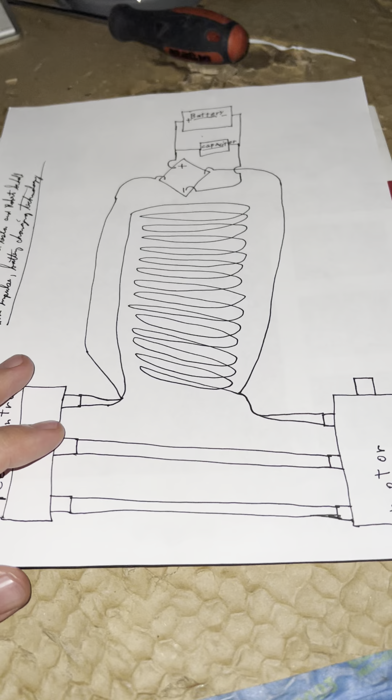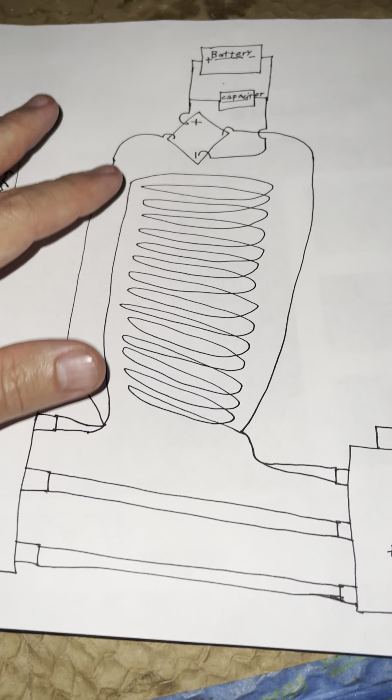So I've been studying video 7 of Energy from the Vacuum, the first 15 minutes. I'm not saying this is what it's saying to do, I'm interpreting. I was inspired to draw this out after watching that portion. By the way, highly recommend watching that series, it's available on YouTube, there are 42 videos available for your consideration.

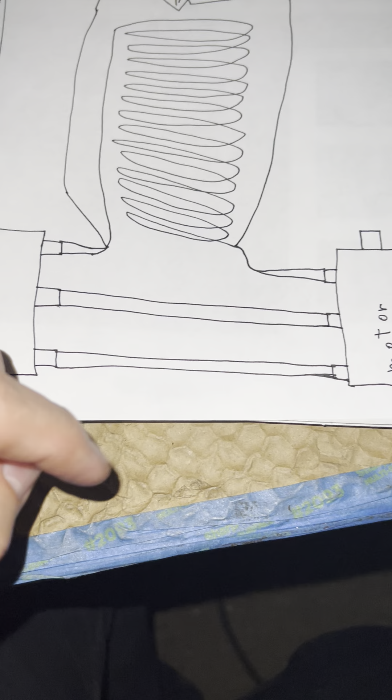So what I was thinking was, let's say I have a motor controller that has 3 wires. The question is, can I run one of the wires in series, going through this coil, so it goes in one side of the coil and comes out this side and goes into the back of the motor, so it's going to run the motor, right?

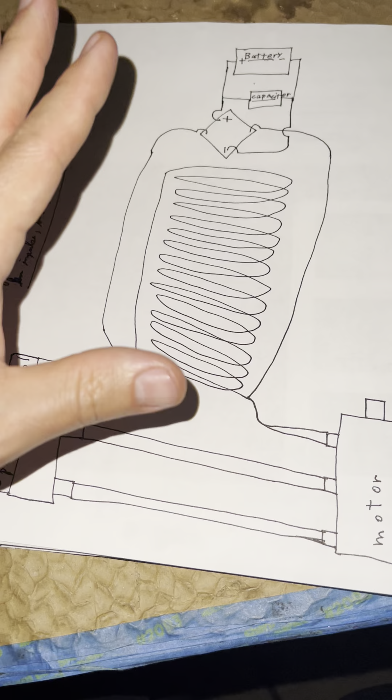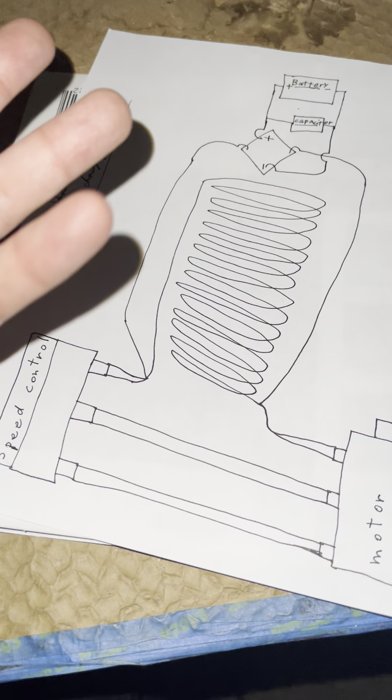In addition to that, I've connected here, and I go into a full wave bridge rectifier, and I'll be using a 50 amp, 250 volt full wave bridge rectifier. If I need to use something different, I'll keep you updated as I progress through experimentation. But I'm going to start out with the ones I have right now, which is approximately 50 amps, 200 to 250 volts.

And then I'll go into a capacitor, and then into charging a battery and see what happens. So it's just an experiment, a thought experiment, and I'm interested in experimenting with this. I'm not recommending anyone do this, I'm just saying this is what I want to do as an experiment.

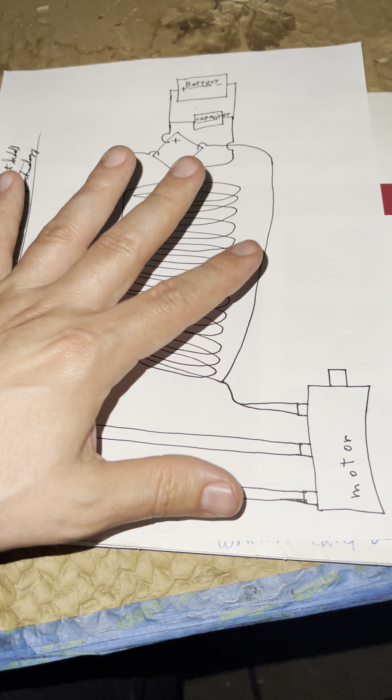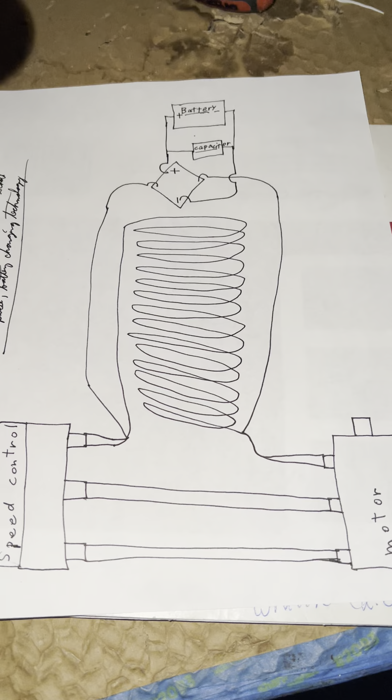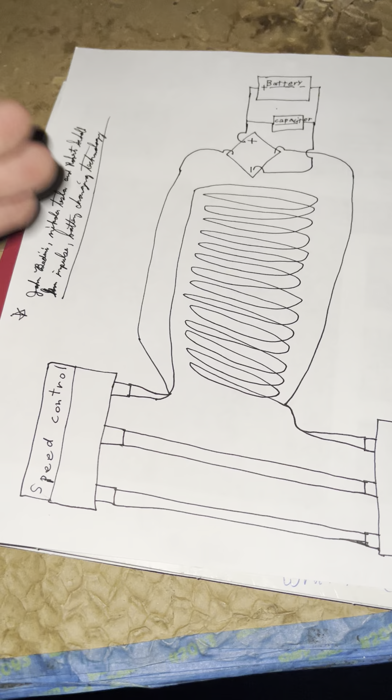Highly recommend, make sure you make copies if possible, a duplicate of the Energy from the Vacuum series. It's really important to have that for yourself, for your research and study purposes. Make sure to save a copy somehow, because I think YouTube allows you to download the videos. I don't know if you need a subscription, but I know the videos can be watched for free right now. If you want to download them, you might need to look into how to do that.

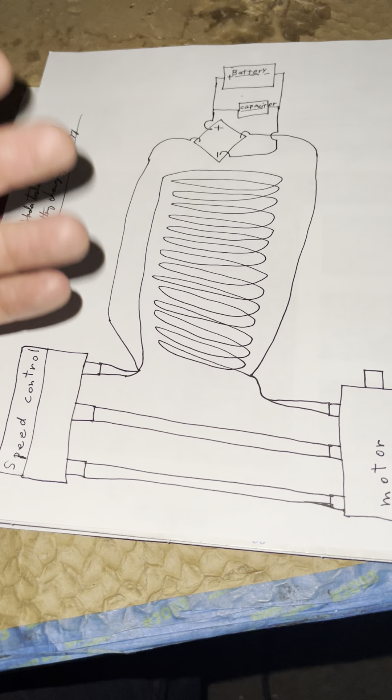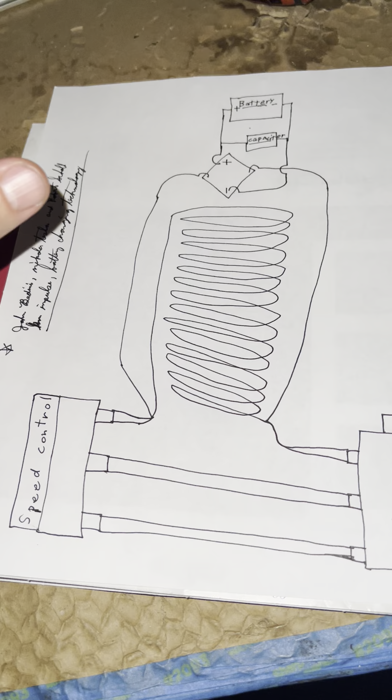But I highly recommend that everyone, even if you think you might be interested someday but don't have time to watch it right now, have someone duplicate that series for you, or do it yourself, and put it aside. On a rainy day, you can watch those videos. And if this is interesting to you, study it and then make your own variation of what you learned there.

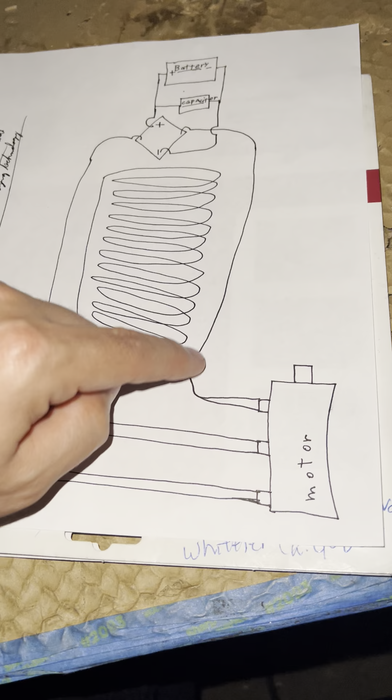This is my variation of what John Bedini was explaining in the video. I thought, well, if I can use that system, can I use this system? It's a question, I want to see what happens when I try this. I don't even know if it'll work, I don't know if the motor will work, but I'm thinking, why won't it work if I'm going through the coil? It should work.

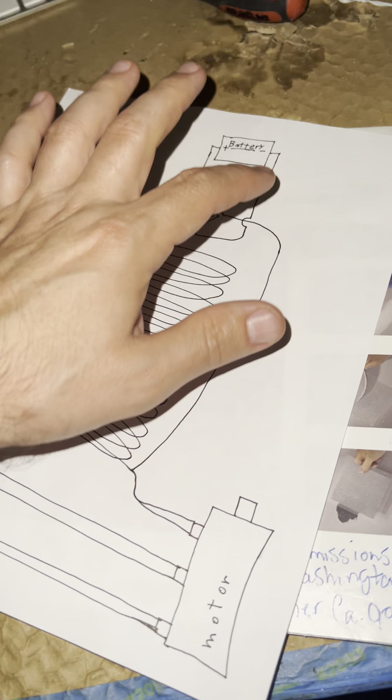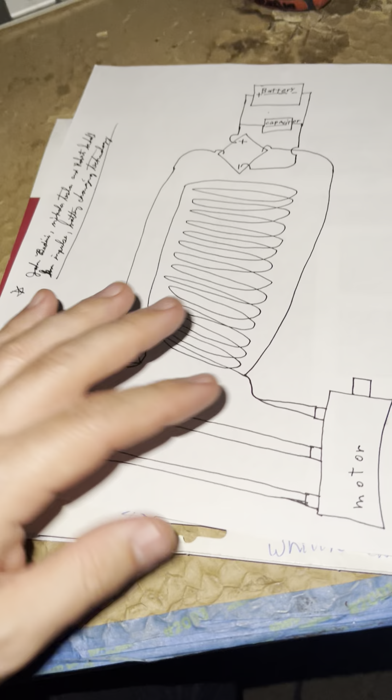Is anything happening here in these wires? This is a full wave bridge rectifier. Why am I putting a capacitor there? I'm hoping that if this is negative energy, will the capacitor change it into positive energy? And then will the positive energy charge the battery? I don't know. What happens if I don't use a capacitor, and what happens if I do? That's 2 different experiments I'll try.

So then I'll see how the battery responds. Does it have any difference in temperature, difference in the way it charges? I don't even know if this will charge the battery at all, and I don't know if the motor will work perfectly, or if the battery will charge very well.

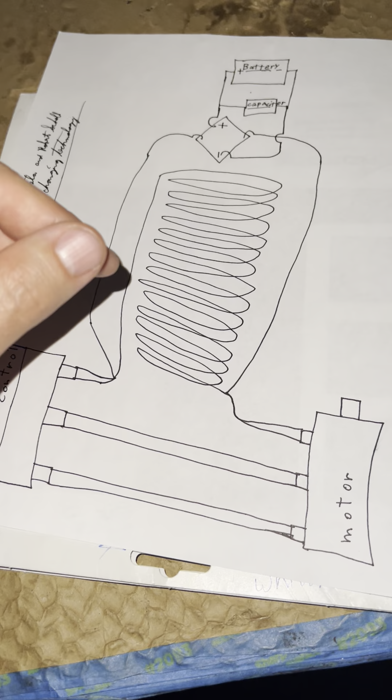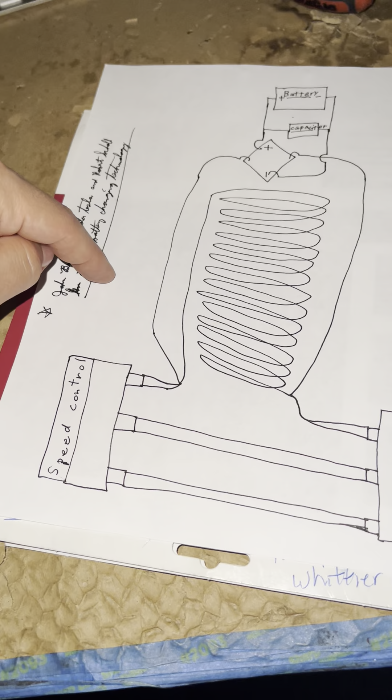Now wouldn't it be interesting if the battery that powers the controller was also able to be charged? Instead of running 2 separate batteries, these are two different tests. One test is this battery, we'll call it battery A, powers the circuit, and this is battery B that's being charged by the circuit. So one battery's powering the circuit and one battery's being charged by the circuit.

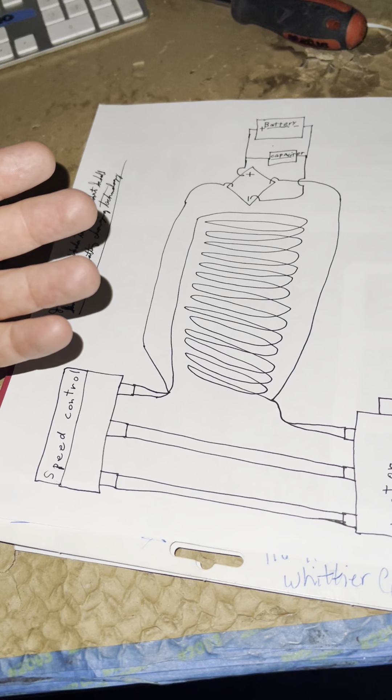And then when this battery's depleted and this battery's full, I swap them: battery A, which was running the circuit, is now being charged, and battery B, which was being charged, moves into the battery A position and becomes the one that powers the circuit. And then the question is, can this battery charge before this battery depletes? That's one of the big achievements.

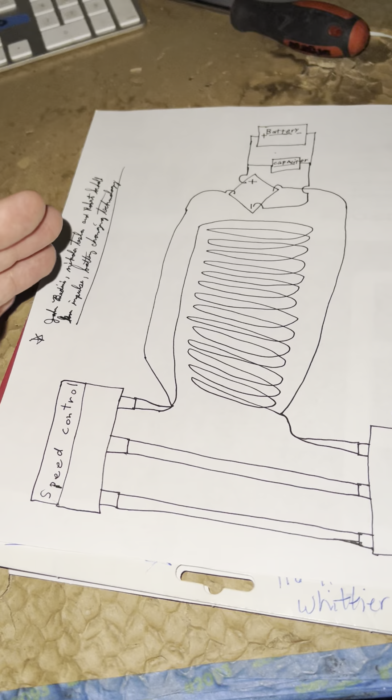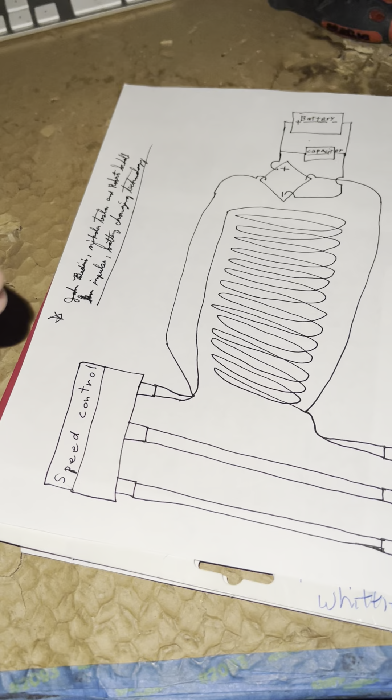A lot of experimenters have achieved 100% success with having battery B charged before battery A is depleted. But I'm not saying they did it with this circuit, they're doing this with John Bedini's circuit, which I don't fully understand yet. I've memorized it, and I'm studying it, and if I need to replicate exactly what he did, I will. But I just want to start with where my imagination goes.

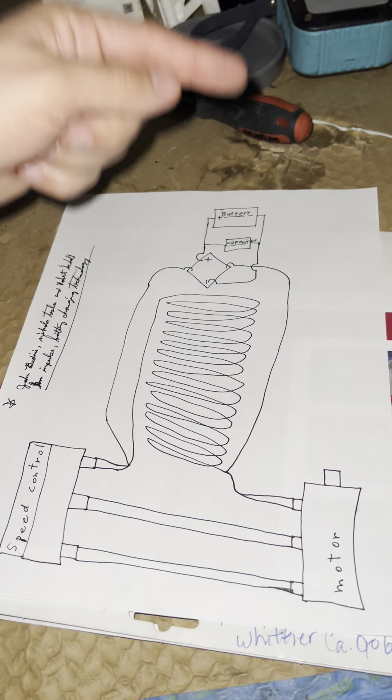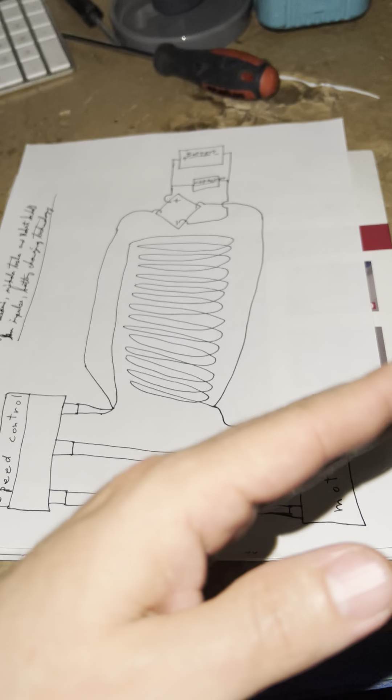My imagination goes to, do I need a bicycle wheel? Do I need to put a magnet approximately every 5 inches apart with all the norths facing out? Do I need a coil that runs that wheel, and another coil of wires that captures the impulse that is ultimately sent to the battery, through a full wave bridge rectifier, a capacitor, and then a battery? Do I need to do that? And if I need to, I will, and I may do it anyway.

Even if this works, I may still do the other experimentations, because I want to see how many different ways a battery can be charged. How many different ways can I charge a battery?